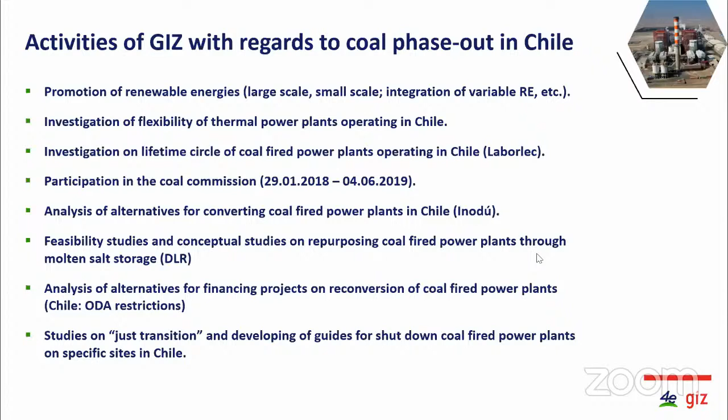The actual situation in Chile: we have 23 coal-fired power plants in operation by this year, with an installed capacity of roughly 5 gigawatts, and they are responsible for 35% of the electricity production in 2020. In the north, we have a lot of PPAs with the mining sector, which needs a very secure energy supply 24 hours a day, 7 days a week.

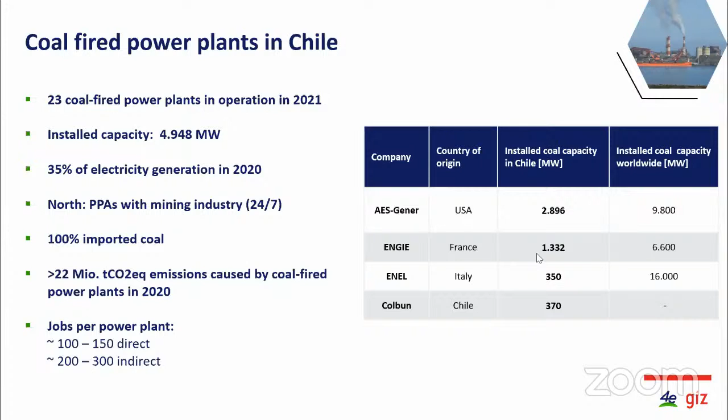Here in Chile, they're firing 100% imported coal. There's no local coal fired at this moment, and the coal plants are responsible for more than 22 million tons of CO2 emissions in 2020. Jobs in the coal-fired power plants at this moment: about 100 to 150 direct and 200 to 300 indirect jobs.

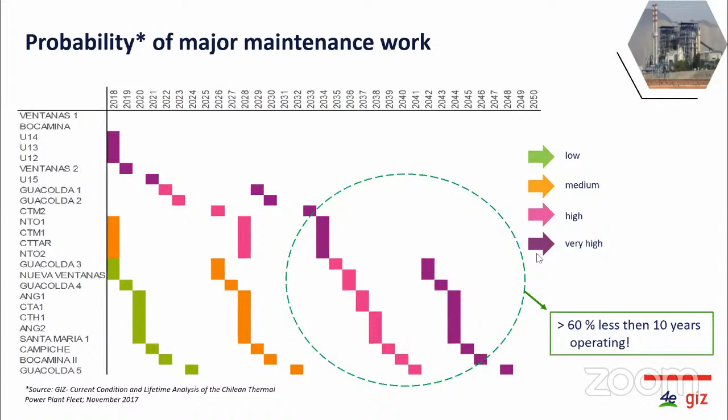A special characteristic of the Chilean coal-fired generation park is the relatively young age of the units. More than 60% of the plants are less than 10 years in operation. An analysis which we conducted in 2017 shows that significant investments for maintenance and overhauling are expected for most of the plants only after the year 2030. The expected lifetime of most of the plants is beyond 2040. It's a challenge for an early phase out of coal.

Nevertheless, in 2018, it was agreed between the Ministry of Energy and the 4 coal plant operators to engage in a gradual phase out of coal on a voluntary basis. A coal commission was installed where I also was a member. And for 1 year, we discussed important topics like international experiences with coal phase out, environmental issues, health aspects, impacts on the electric power system, impacts on future electricity prices if you shut down the plants, the social and economic impacts, and also, of course, the alternatives for reconverting the power plants.

In June 2019, it was decided to go on with the voluntary and gradual phase out until 2040. In the first phase, 10 units will be shut down until 2024, and 5 have already left operation, and another one will follow earlier this year, anticipated already in 2021.

Why is reconversion of coal-fired power plants an attractive option in Chile? We are talking about relatively new plants in Chile. We have important infrastructure installed, which can still be utilized. Jobs on the plant sites can be maintained. Decommissioning of power plants is complex and very costly. And the power plants are located at neuralgic points of the Chilean power system. We will learn a bit more about it later on from Juan Carlos.

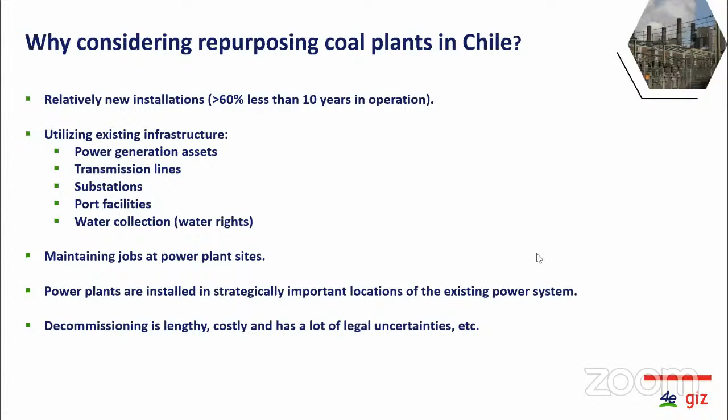Which alternatives for reconversion are considered? Conversion to gas-fired power plants, conversion to biomass plants if you have biomass, conversion to waste incineration if you have waste. In the case of Chile, if you're talking about gas-fired, it's LNG. Gas firing together with green hydrogen is also an option.

The use of the land and the structure for industrial development is possible. Using the port infrastructure is possible. Using the sites to install seawater desalination plants is possible, and converting them to green hydrogen production plants is also possible. Also possible, and this is what we are talking about later: converting them into thermal energy storage. There we analyzed two alternatives: one with hot rock, volcanic stones, and the other with molten salt storage.

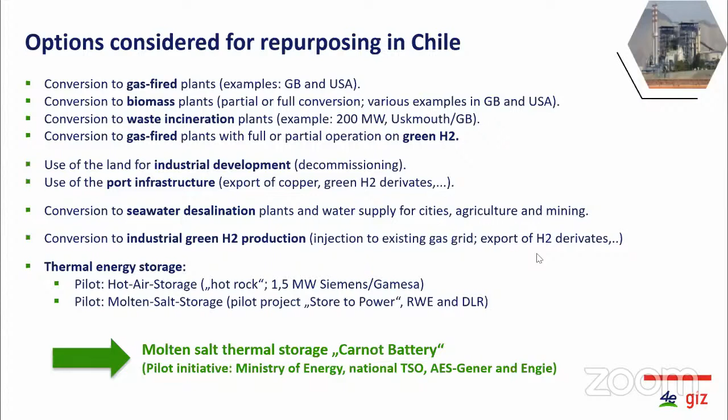And after analyzing the options, we concluded that a thermal storage charged by fluctuating renewable energies with molten salt would be a very interesting solution for sure. We started together with our technical advisor, DLR, the Ministry of Energy, the National System Operator, and the companies AES Gener and ENGIE to work on pre-feasibility analysis and conceptual studies for several power plants in Chile. Juan Carlos from the Chilean System Operator and Michael from DLR will tell you in the following presentations about our findings.

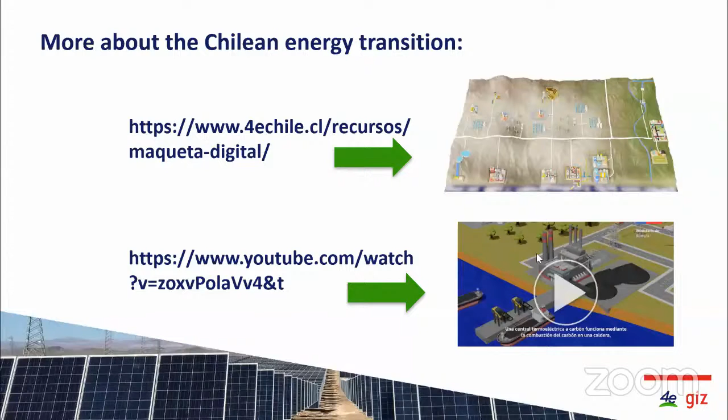Okay, thank you very much, Rainer, for that overview of the situation in Chile. I'm sure many of the participants from other countries were mentally going through a comparison between the situation in Chile and the situation in their own country. I see we have participants from really all over the world, if you look in the participants box.

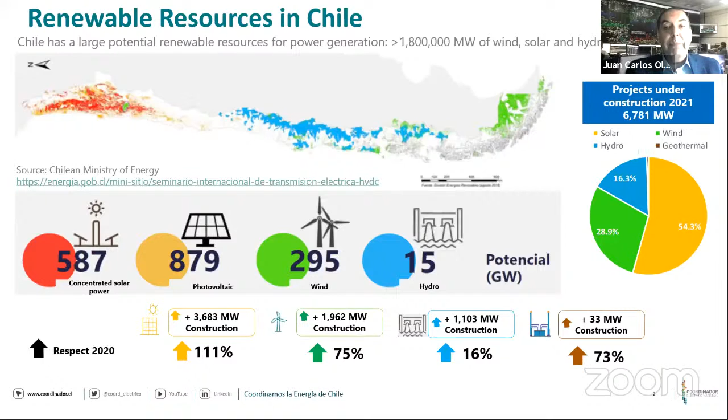Well, what is the commitment regarding decarbonization? By the end of 2019, we had roughly 5,500 megawatts in coal-fired units in our fleet. And the contribution to energy supply by the end of 2020 was roughly 35%. That means it is an important part of the energy supply. And between 2019 and December 2020, we have decommissioned roughly 580 megawatts of the coal-fired fleet.

And the first stage of the coal decommissioning schedule agreed among the authority, the government, the Ministry of Energy, and the companies has a target of decommissioning 30% of all the fleet by the end of 2024. But the country wants to accelerate the decarbonization process, and that's the reason why there is a law initiative promoted by Congress to accelerate this process by 2025. This means that we have to be very creative to develop alternatives to try to reach that target.

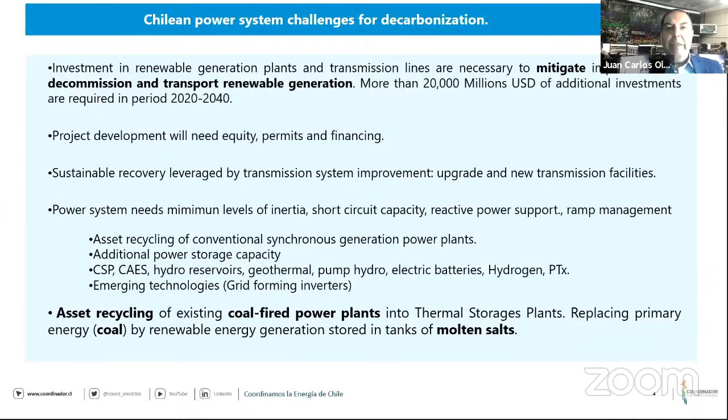Anyway, asset recycling of existing coal-fired power stations into thermal storage plants is an interesting alternative, and this technology will replace the primary energy source, coal, with renewable energy generation stored in tanks of molten salts. This is very interesting because it's a fast way to decommission or stop the use of coal and move to renewable energy without causing a relevant impact on the system.

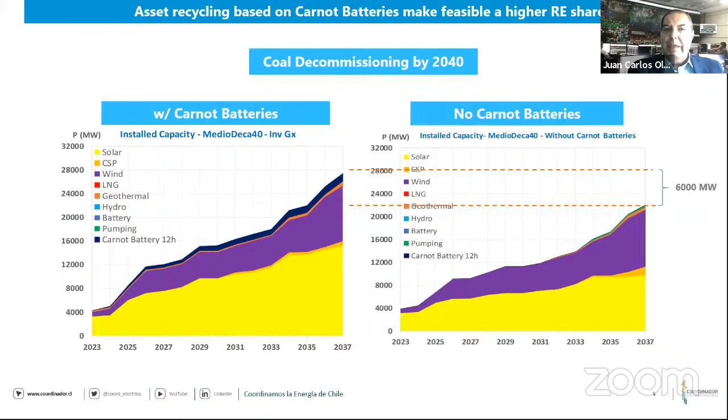We have developed some exercises or simulations of the evolution of the power system by 2040, reconverting coal-fired plants to Carnot batteries. On the left side, we have a graph of the capacity of the system to connect new renewable generation capacity to the grid with Carnot batteries, and to the right, with no Carnot batteries. And you can see that as we develop this asset recycling, we will be able to connect 6,000 megawatts of additional renewable generation capacity. That's a good and very big contribution of this technology.

And as a conclusion, energy transition needs a focus on reliability and quality of service of the power system. This is for every power system, not only for Chile. Accelerating the decarbonization process requires smart and cost-effective solutions. Asset recycling appears as an attractive solution to accelerate the decarbonization.

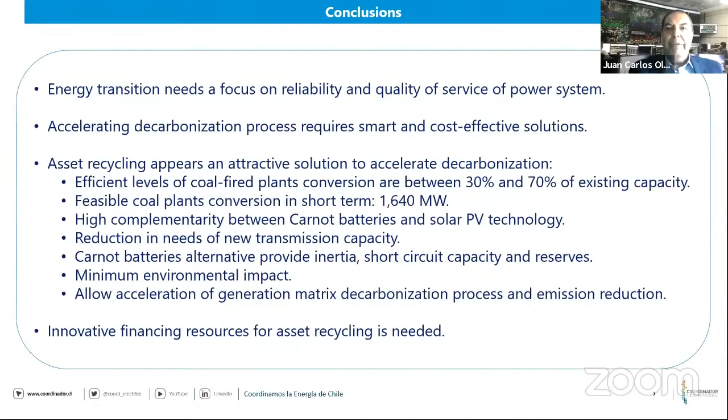Great. Thank you very much, Juan Carlos. Thank you very much for giving us a lot of information in a very short space of time, a lot of information about the investment needs and investment opportunities for decarbonization and for repurposing the coal-fired power plants in Chile, and for the very interesting emphasis on asset recycling. Reusing part of the existing assets and the economic, financing and environmental implications that has.

In a moment, we'll turn to Michael Geyer, who will talk in some detail about technologies for repurposing coal-fired power plants using the case of Chile.

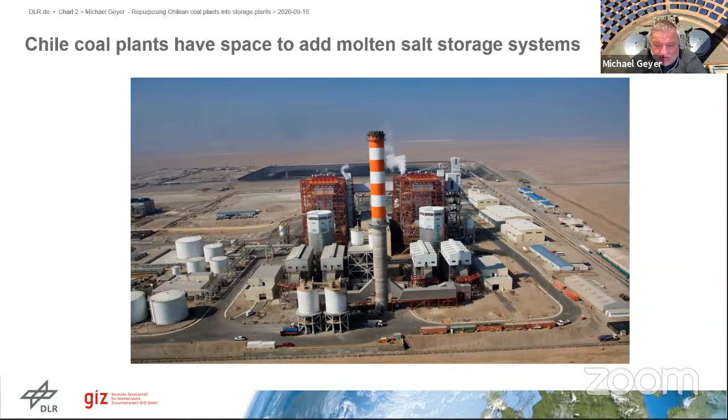And there you store the molten salt, that is a mixture of sodium and potassium nitrate, at 300 degrees centigrade cold and at some 565 degrees centigrade hot. And you heat this salt by pumping it through an electric resistance heater from the 300 degrees to the 565.

And so you can here do the power to heat. And then you use the existing infrastructure, the existing steam cycle, the existing generator, the existing grid stations for reconverting this heat to power.

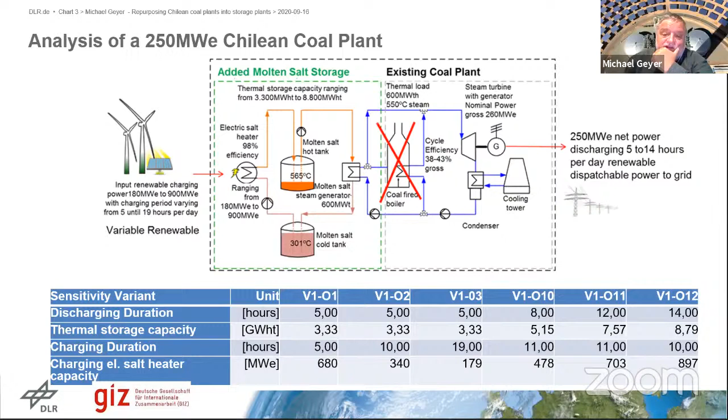So that is how the system would look like. We also have studied this together with our colleagues from RWE for retrofitting a German lignite coal plant with molten salt storage. You see here on the right hand side the existing old power plant, and on the left hand side you see the addition, which are the cold and the hot salt tanks, the electrical heater, and the molten salt steam generator.

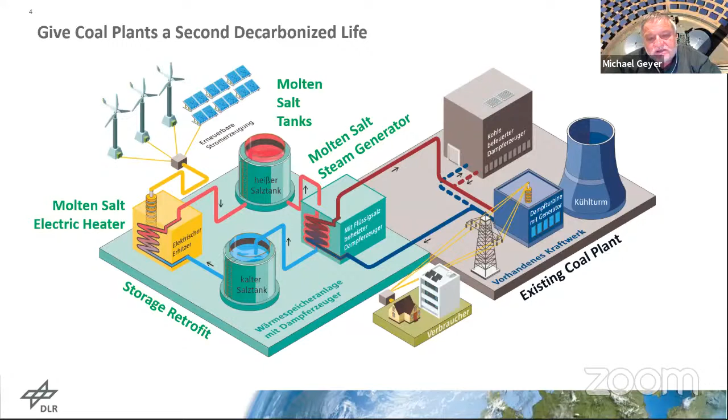All this is basically existing mature technology. The only, let's say, innovative thing here is the integration of such a system in an existing coal plant. Next slide.

So what you have to add to your coal plant, you see it here. Here it is electric heaters for charging the molten salt by PV or by wind power. Then you have to add the molten salt tanks, and you have to add then the steam generators, which are fired with the molten salt.

Now, to give you an idea on the lifetime, for example, the most recent plant, these 700 megawatts that are currently being built with 12 hours of storage, the 700 megawatt CSP plant with the 12-hour molten salt tanks. These are designed for a lifetime of 35 years. So that is, let's say, a long and sustainable investment.

And at the end of the lifetime, the good thing is that the molten salts are just fertilizer. They don't degrade, and either you can reuse them in another molten salt storage system, or you can just dispose of them by using them as fertilizers. Next slide.

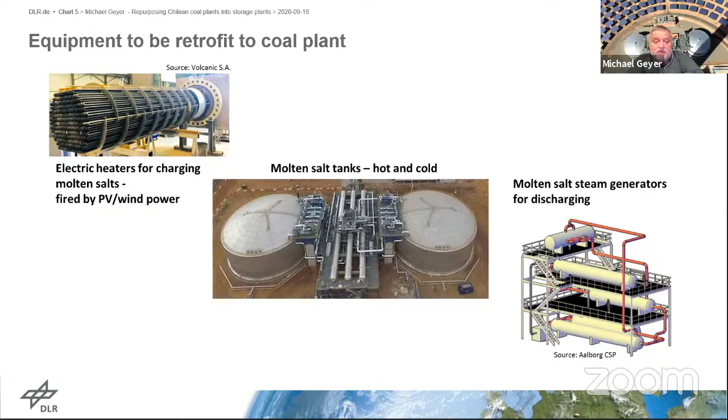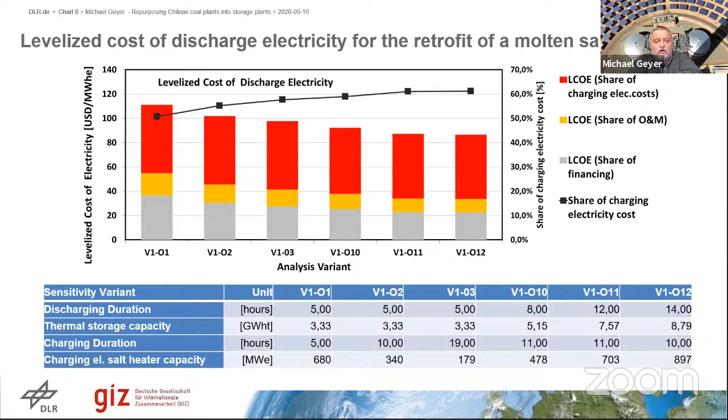Here we have assumed that you can buy this in Chile for $20 the megawatt hour in the excess times in order to charge your storage system. Then here, this is basically the capex, which is the financing, and this would be the opex of the plant. So, let's say, as a first estimate, you would have some cost of some $90 per megawatt hour. Next slide.

Now here, as Carlos already indicated, the addition of these molten salt storage to the coal plants would increase the firm capacity of the system. And here you see that for the years, especially after 2030, this would add stability. That is exactly the same message as Carlos.

And this corresponds also to when we did the Andasol 1 plant in Spain, and we came to a substation that had already been overbooked by wind plants, and at that time that was 2006. When we added a concentrated solar plant with 6 hours of molten salt storage, the short circuit capacity was increased, and that allowed adding more wind plants than without this plant with the molten salt storage system.

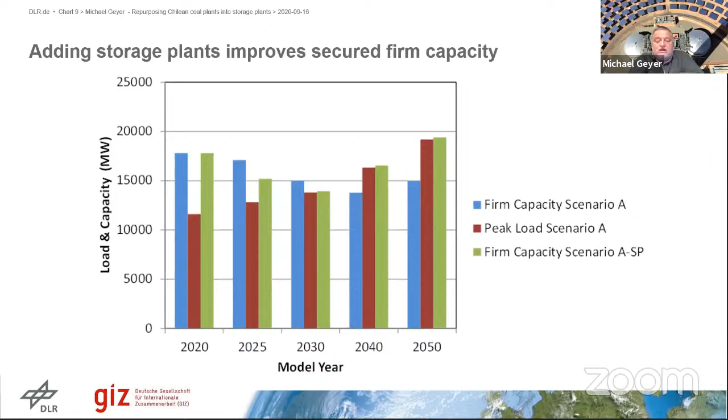So in this respect, the conversion of coal plants into thermal storage plants will increase, as Carlos already showed, the ability to add more variable power and make this variable power dispatchable. Next slide, please.

Next slide. Chile had been selected as the example for this first study. Basically, we believe it's an ideal place to start doing it. First of all, because there most of the coal is imported, and these coal plants were auctioned in 2007, 2008, and when they were auctioned, their PPAs were above $100 per megawatt hour, which today may seem high to you, but that was the PPA cost of coal plants in Chile that had been auctioned at that time.

Secondly, this retrofit of the coal plants decarbonizes the Chilean power park while still granting 100% secure dispatchability. And also the fossil backup firing option can be maintained. It reduces the curtailment in the north of Chile, and it will conserve jobs, and so make a fair and sustainable transition from fossil to renewable. Also in Chile, they are currently finalizing the CSP plant with the same molten salt storage system, and so there exists the technical know-how and the technical capacity to implement such a system. Next slide.

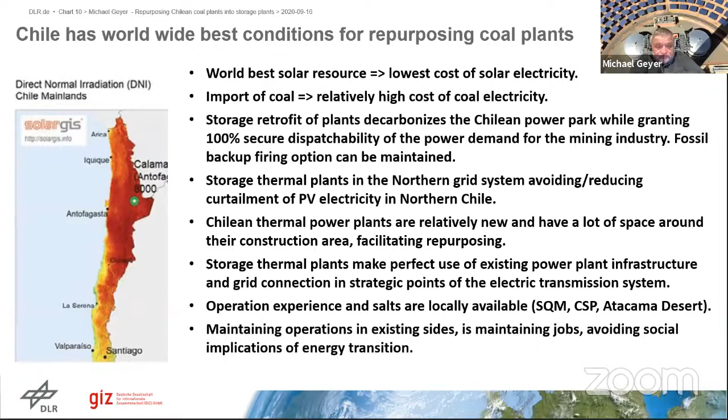And what I myself found most impressive is that Chile doesn't only have the best solar resource in the world, but in this place where there is the solar resource, the Atacama Desert, is where today's storage systems are mined. On the one hand, the lithium, which is distilled by evaporating salt mixtures from the Atacama Desert. And a byproduct from this mining is the nitrates, which are required for the solar molten salt storage in the same place. So in Chile, we get the sun and we get the basic materials for both the lithium and the molten salt storage. And all this mining is done with solar energy.

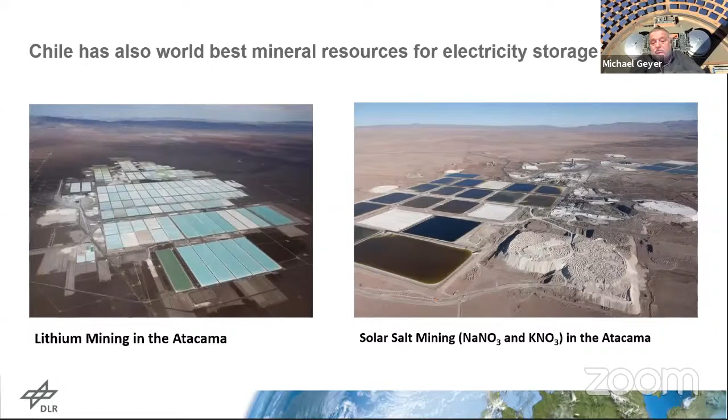So that is basically, in short, my conclusion. And again, I think this is a great opportunity to give coal plants a second life and to expand the proven maturity of concentrating solar power storage beyond concentrating solar power to the utilization with PV and with wind. Thank you very much.

Great, thank you very much, Michael. I've seen questions flooding in as you've been speaking, questions about how the technology works, and perhaps more so how the economics of the technology works, and why choices are being made to go with this technology rather than whatever alternatives there might be. So please keep the questions coming. Let me turn now to Abhishek Bhaskar from the Climate Investment Funds, which is managed by the World Bank. Abhi, please go ahead.